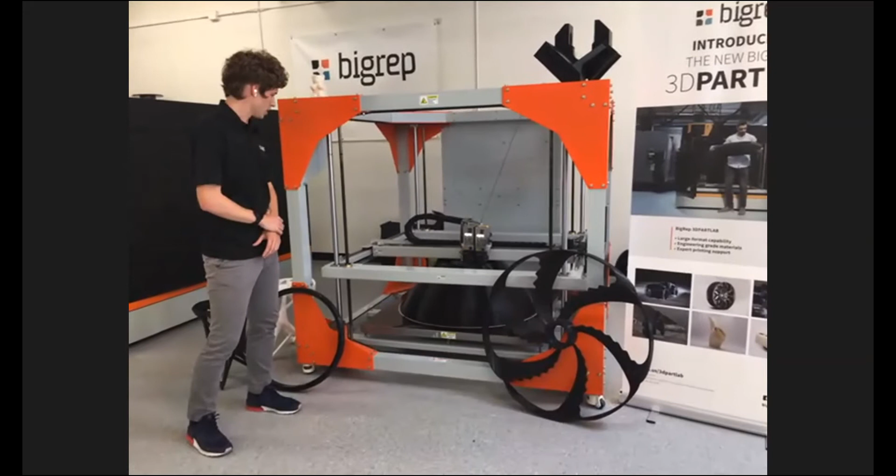So right away you can tell, outside of the large volume, there are 2 extruders, meaning we have dual extrusion capability. They are retracting heads in that both of them will not be printing at the same time, but one will be raised or lowered in the Z so that they can switch off during the prints. So the part we have here is just a very large dual extrusion print.

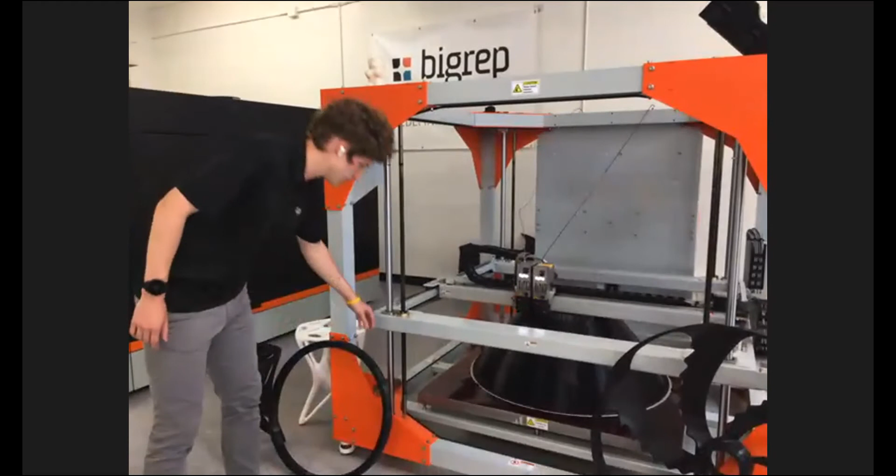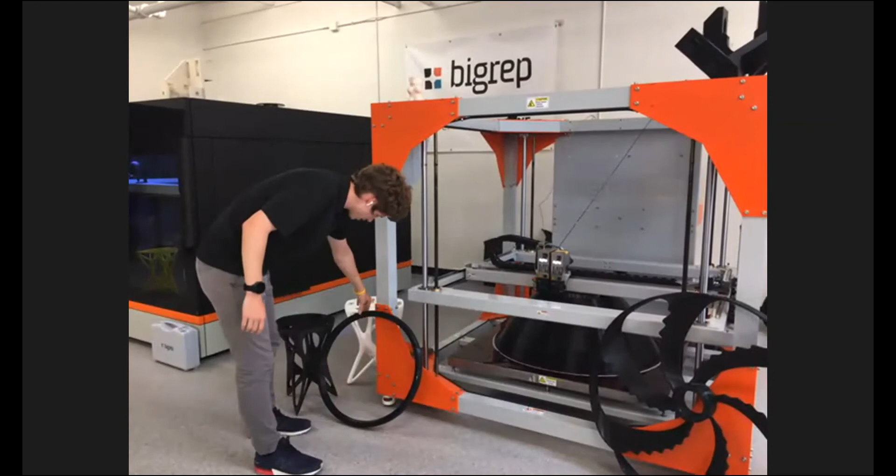The black material is our TPU called Proflex, rubber-like, similar to a car tire. And with dual extrusion, we offer the capability of running either a soluble support, a different color of the same material, or a stronger material for added benefits. In our case, the gray material is our non-toxic ABS called ProHT, similar to what I have here, just strong, durable, very versatile.

The gantry and the motion is belt driven, controlled by Nanotec stepper motors. The bed is 1/4-inch aluminum with a layer of polyimide, or what we call Kapton film. The Kapton film is used for material adhesion for that first layer, as well as spreading out the temperature so everything prints well and you're not going to have any warpage or shifting of the parts as you get higher and higher in the Z.

So Emma, if you want to take us around the back, we can take a look at the types of materials that we're running. So BigRep, we found our niche in large format FDM polymer, or plastic, printing. So no pellets, no powders, and no metals.

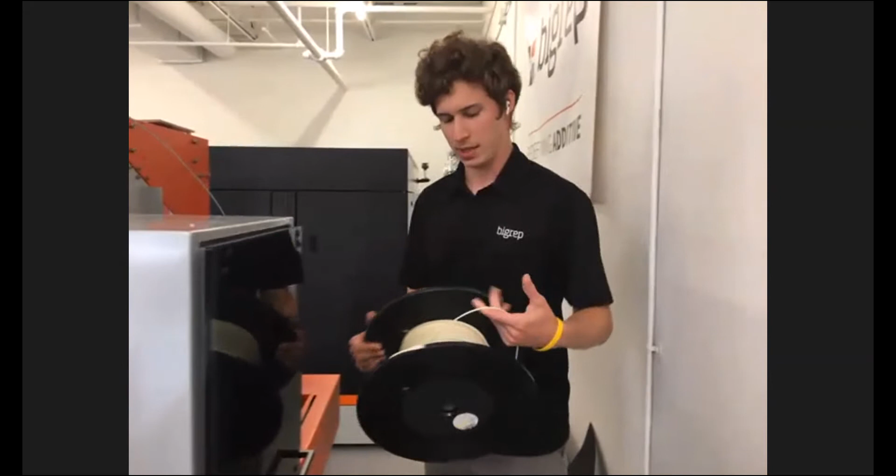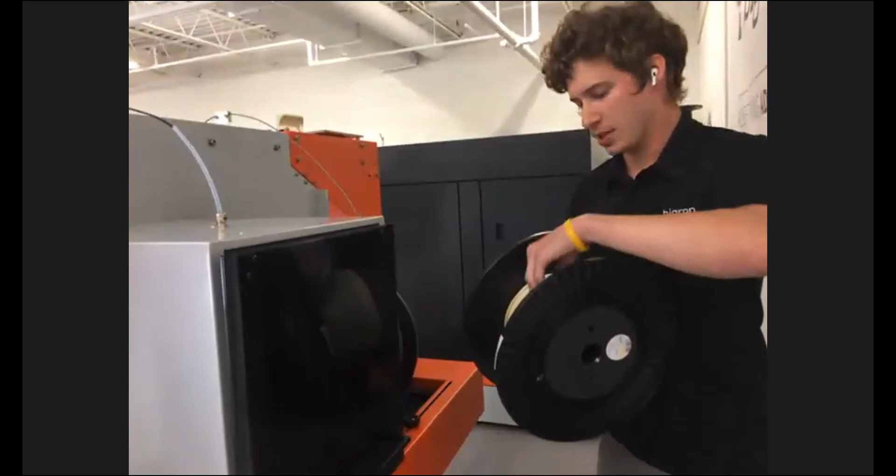So you can see here we have 2.85 millimeter filament. The filament spools range anywhere from 2.5 kilograms to 8 kilograms, or at least that's what BigRep sells. BigRep does offer an open material platform. So if you don't want to run our materials, it's very easy.

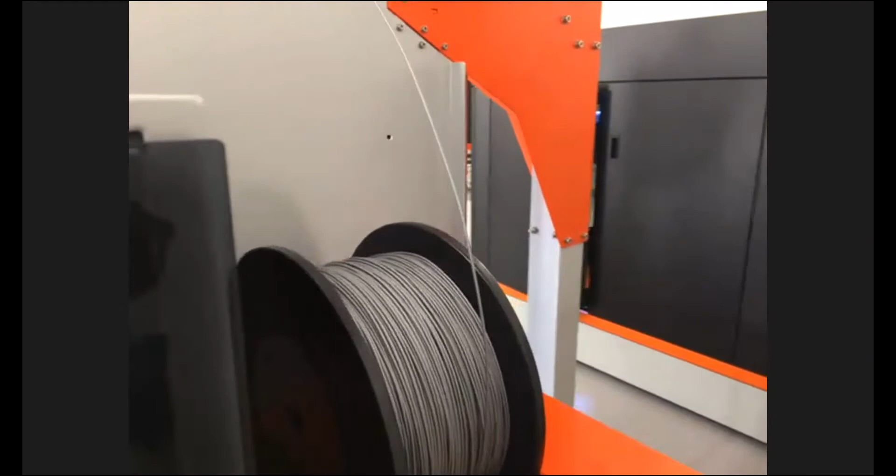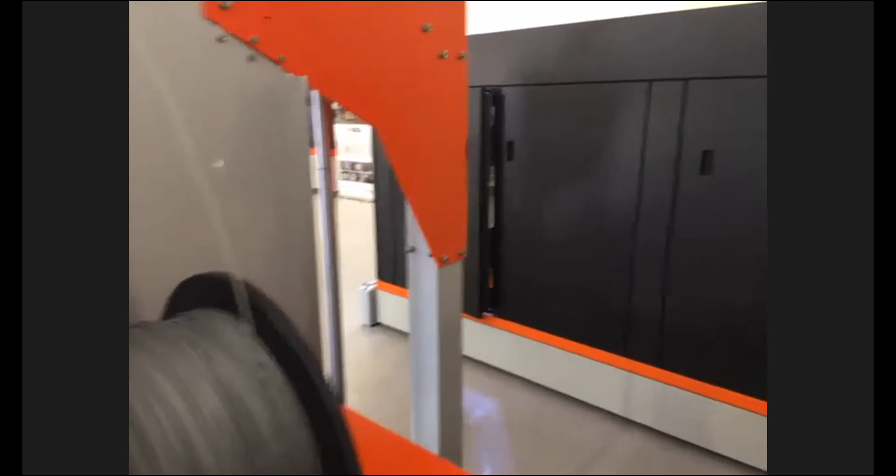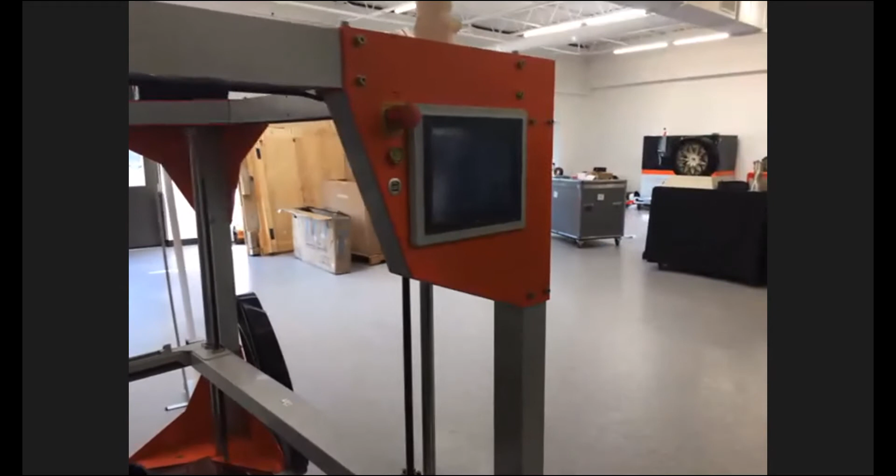Plug in your files, press go, the machine knows what it's doing. Or if you want to use a third-party material or a new material that we haven't certified yet, the machine doesn't care. We trust our engineering. We trust the throughput of the machine to be able to withstand whatever the customer wants to run through it. So that's something we definitely pride ourselves on.

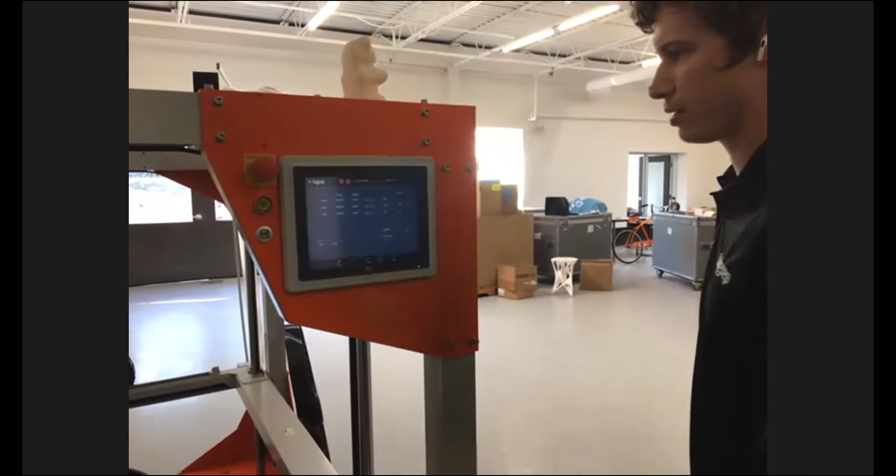What Amnon is showing here is just the user panel. This is where you would load up jobs, run through all of your temperatures, your calibration, things like that. Very easy, very straightforward in terms of usability.

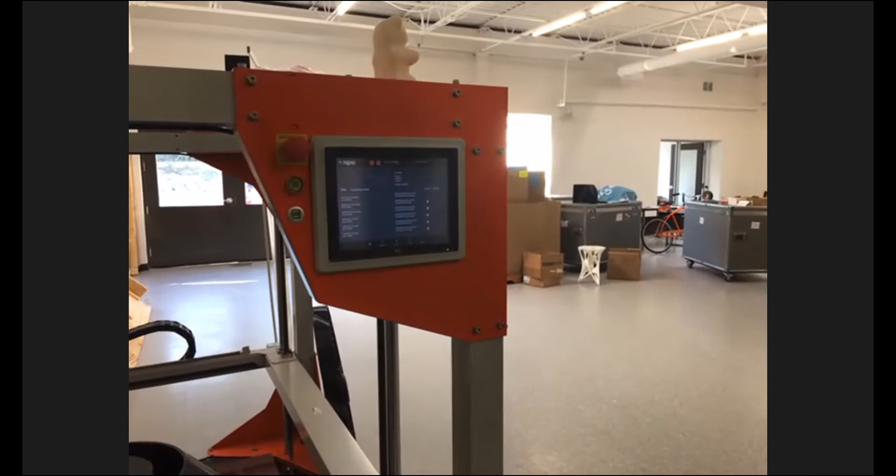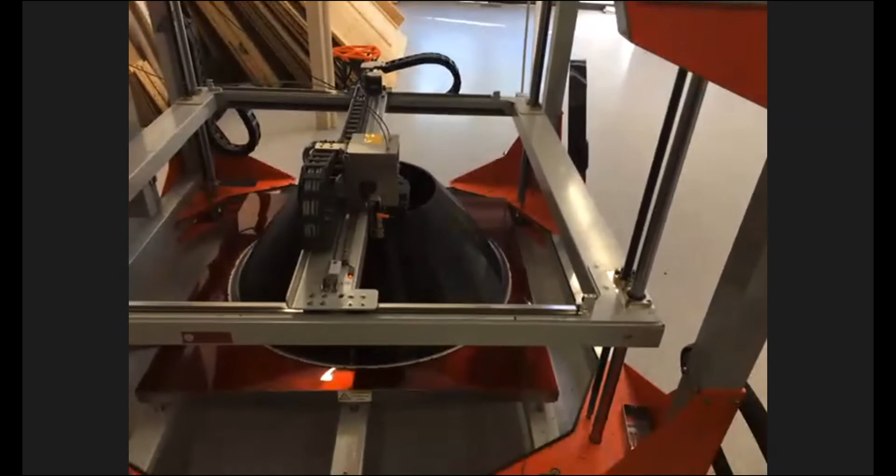Maintenance is pretty minimal outside of the initial calibration during installation. As long as you're keeping the gantry and the bed clean of any dust or leftover particles, as well as keeping the spindles in the Z axis well greased, there's not much to do.

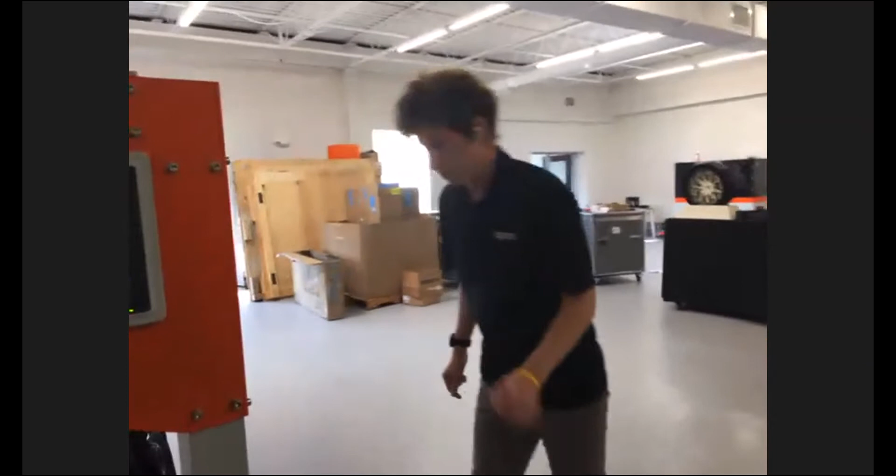And then some other added bonuses, if you have the BigRep One on an Ethernet connection, that allows for online file upload. We also have a couple added features like camera, remote monitoring, and things like that. I think that's it for the One. At this point, I'll take any questions, anything that I may have missed so far.

Yeah, we've got a couple questions that have come in. The first one is about the semi-automatic bed leveling feature. Can you explain that? Sure.

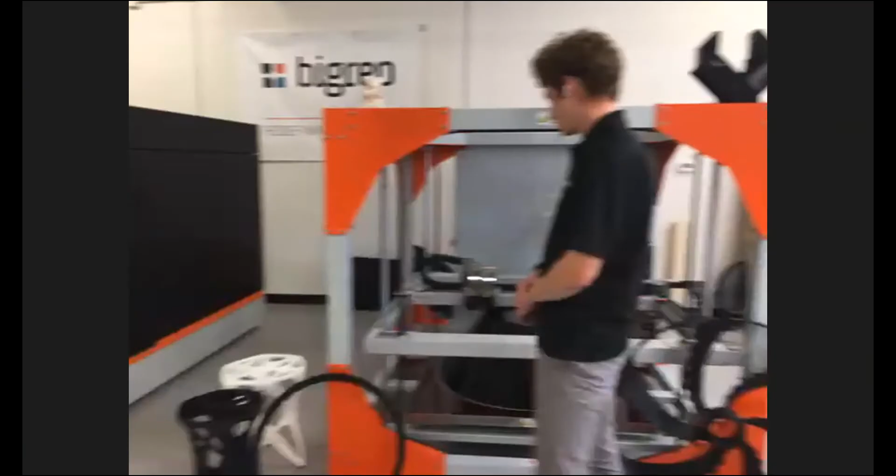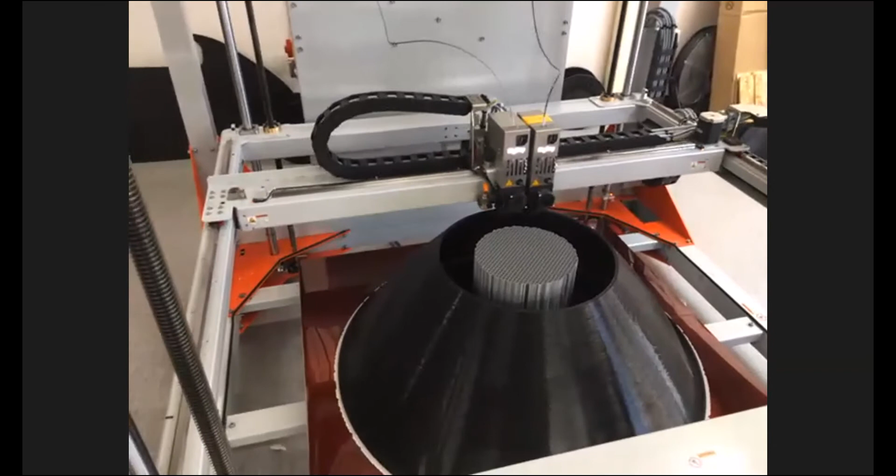I don't know if you actually want to take a closer look at our sensor on the left here. So what we have is an inductive sensor, in short a proximity sensor. What that does is go around the outer edges of the bed. I believe it's 8 separate points. At each point, you will get a certain reading. Our tolerance for that reading is about plus or minus 0.02 millimeters.

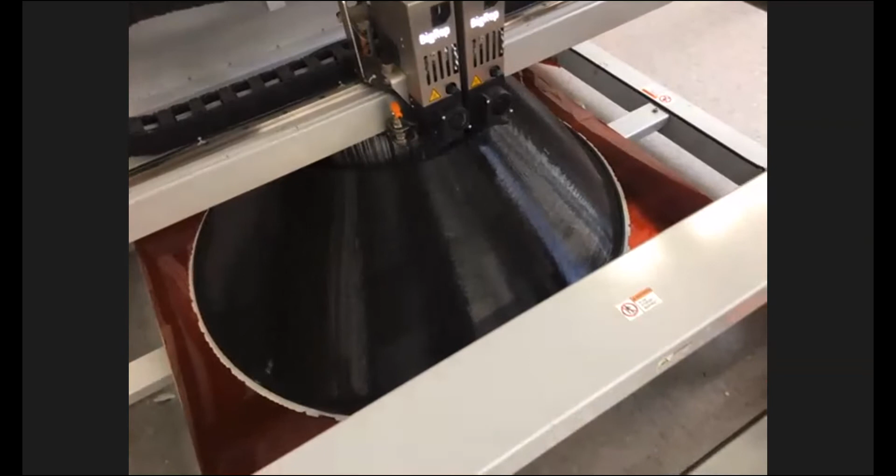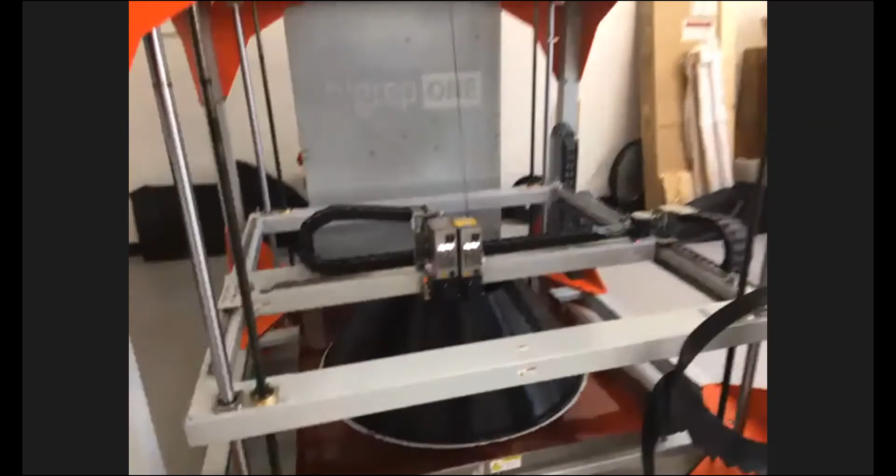So we would get each point all across the bed to within that range, so that after a couple iterations of going around the bed, it takes the technician maybe 15, 20 minutes. The bed will be perfectly level. We do this twice during installation. After that, I don't check it for at least another month or so, unless you're seeing quality issues, which is very, very rare. So very easy, very reliable. Again, that's what you're looking for in a workhorse like the One.

All right, another question we've got: is there any influence from ambient room temperature on the printer?

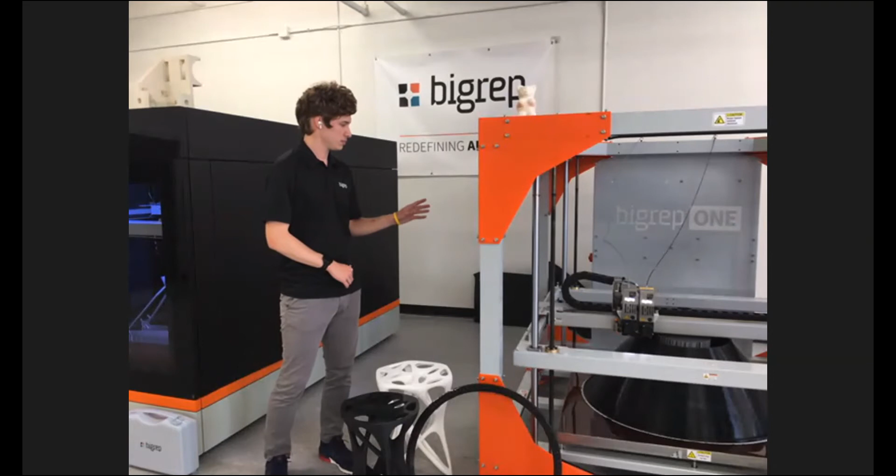So for generic stuff like PLA and Pro HT, working temperature is anywhere from 40, 50 degrees Fahrenheit up to 90 or 100. Obviously if you're in the dead of summer in Arizona, you may see a small change in the way the material prints. For materials like PVA or TPU, you saw earlier when Amnon went behind the machine, there was a dry box around one of the spools. So we do some pre-processing or pre-drying of the material before it's run, just to alleviate any temperature or humidity issues that may come up in certain facilities.

All right, good. Got a couple more questions coming in here. How difficult is removal from the build plate?

Part removal is material dependent, similar to the temperature and humidity issue. For example, TPU does like to stick a little bit to the bed, but when you cool the bed from 60 C all the way down to room temperature, that thermal process releases the part. Some customers like using the 3D printing adhesives we provide. They're water soluble, so if you use a spray bottle around the edge of the part, the water will soak in and remove any leftover adhesive, creating easy removal of the part.

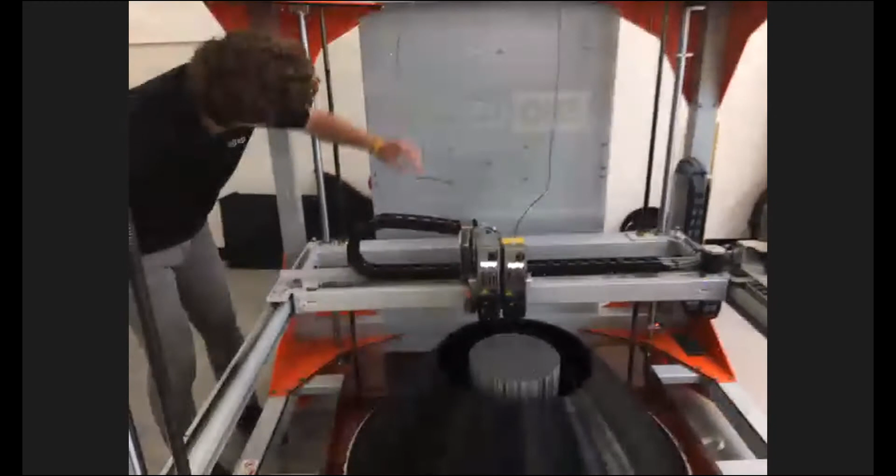Great, and BigRep, big parts. One question that came in: how easy is it to swap materials if you have to do it during a build? Yeah, so there are a couple different locations on the printer where we have out-of-filament sensors. There's one in the extruder and one above the filament chambers.

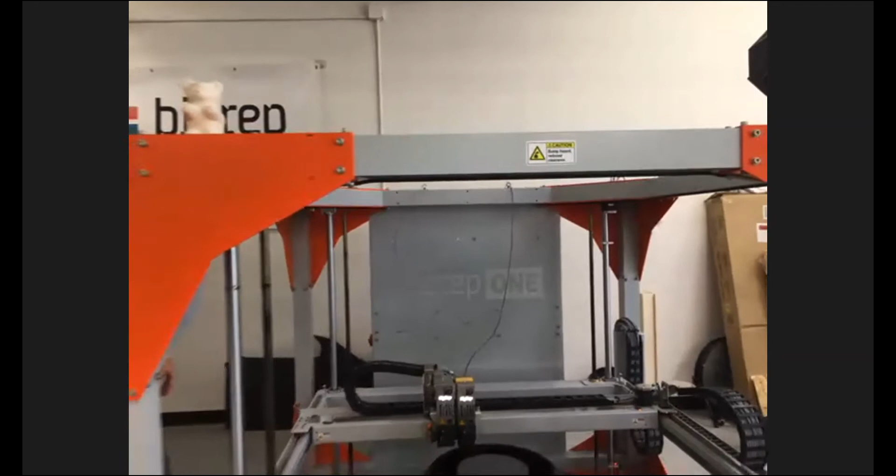It's a physical switch. When it detects no filament, it gives a pause sequence to the printer. Wherever the head may be, once it recognizes that command, it will pause, turn off the nozzle temperatures, raise a little bit from the bed, and then give instructions for the user to reload material, turn the nozzles back on, and resume. It resumes from wherever it previously stopped.

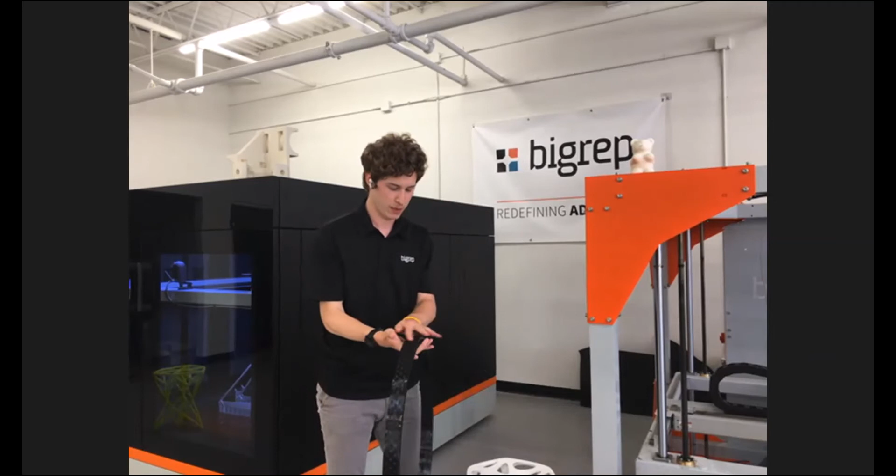So one thing I forgot to mention with the nozzles: they can get upwards of 300 C. With the BigRep One in its third iteration, we've come up with power extruders which have the ability to change nozzle sizes anywhere from 0.6 millimeters all the way up to 2.0 millimeters. Depending on the types of parts you're running, something with a bit of tread or maybe a simpler geometry, you can add different hardware to go either low and slow for very good looking parts, or run the 2.0 for faster throughput. They won't look as good, but depending on the application, you may not need it.

All right, looks like that's all the questions on the One. All right, we'll move on to the Pro. Yes.

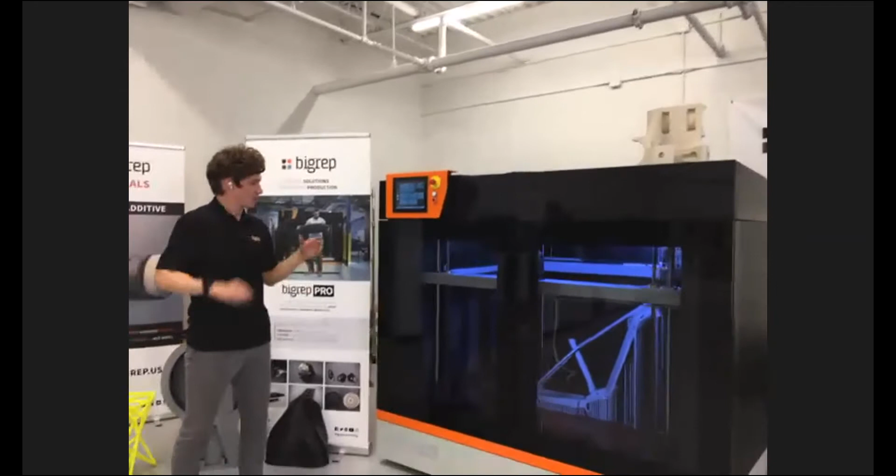All right, so the Pro is kind of like our upgraded version of the One. Clearly it has the full enclosure, and with that we can run higher grade engineering materials. So in addition to the enclosure, there are two main features that I think separate the Pro from a lot of the other standard industrial 3D printers. One is the new type of extrusion technology that BigRep has developed, which we call MXT. And then the gantry and the control systems.

We have partnered with Bosch Rexroth to incorporate their electrical components into our printer, so that we can track a lot of data, run it really fast, and have the consistency and throughput you're looking for in a high-end machine such as this.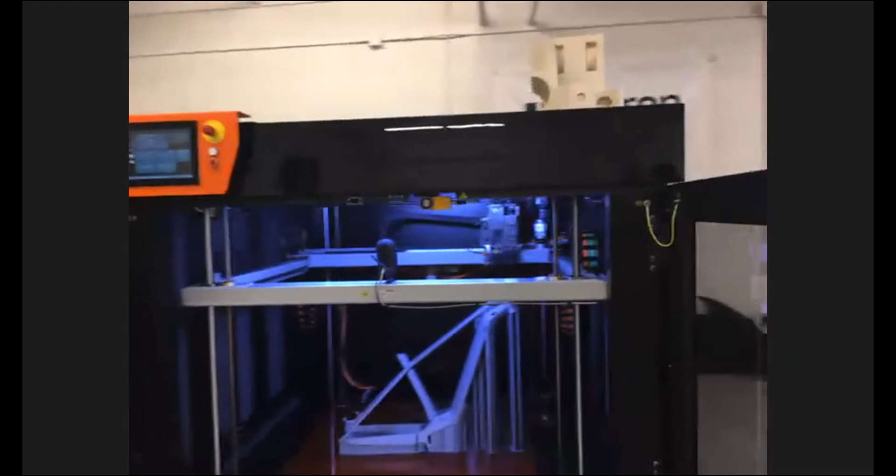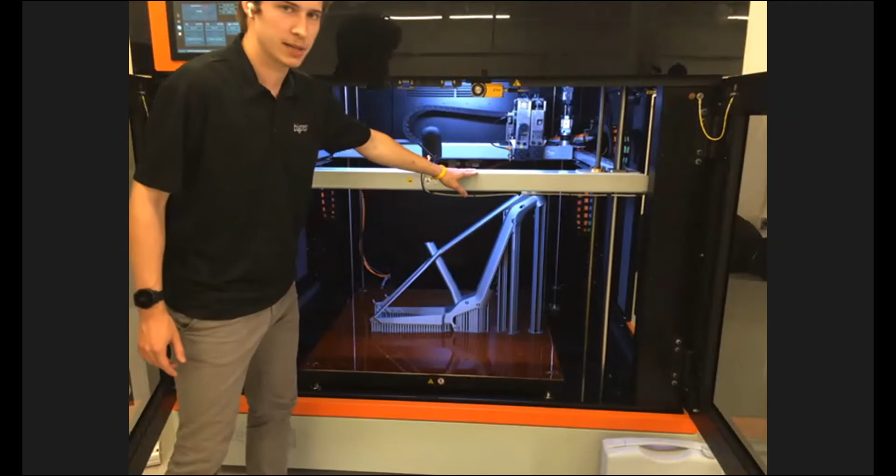So if I open up the door, I can get a nice little view of the inside. This part here finished, I believe, either this morning or last night. It's in our Pro HT. On the upper right-hand side, you can see the two extruders. I mentioned MXT — we also offer an extruder called ACE, very similar to the BigRep One extruders.

It just goes a little bit faster because it has a little bit more upgrades. So MXT versus ACE—let me take a step back.

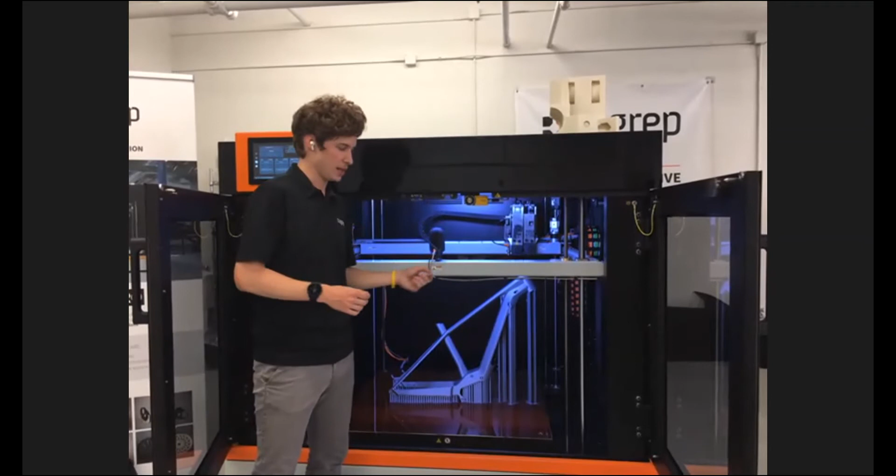The limiting factor in terms of speed for FDM printing is the thermal process. You bring in your filament, have it heat up, and constantly wait until you can continue moving with your print. With MXT, we now have a small pool of pre-melted material so you're no longer waiting for that filament to melt. You will always have something to push out, to extrude.

So now our limiting factor is actually how fast we can move the gantry with the new CNC control system. The MXT right now is for materials like nylon, with more engineering grade materials to come. The ACE serves as a support extruder, and handles all the other standard materials that we offer.

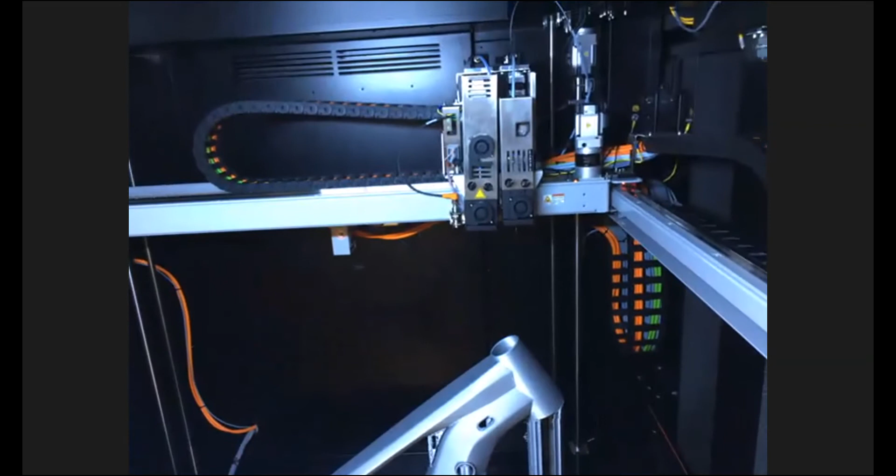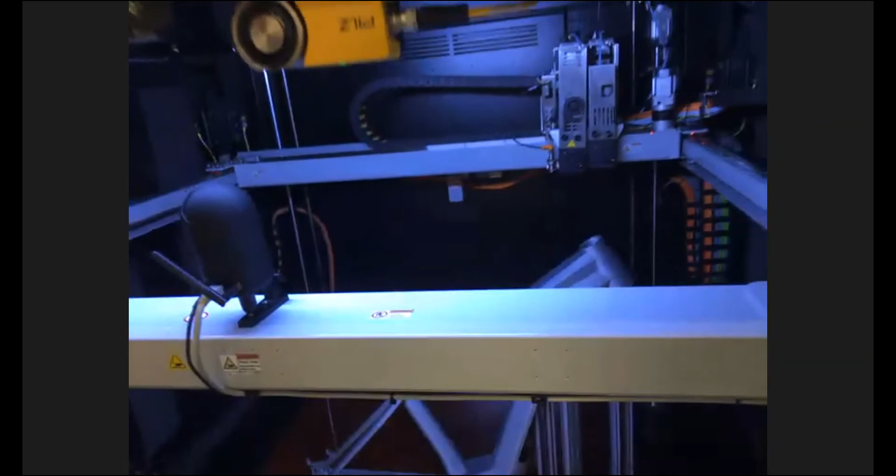In terms of setup, we offer dual ACE, dual MXT. The ACE will have a range of nozzle sizes, like 0.6, 1.0, and 2.0. The MXT right now will have 1.0, with the other sizes soon to come.

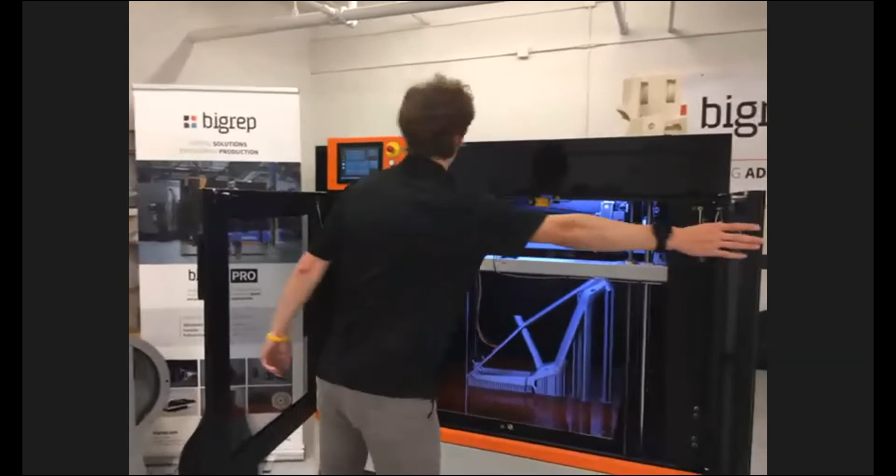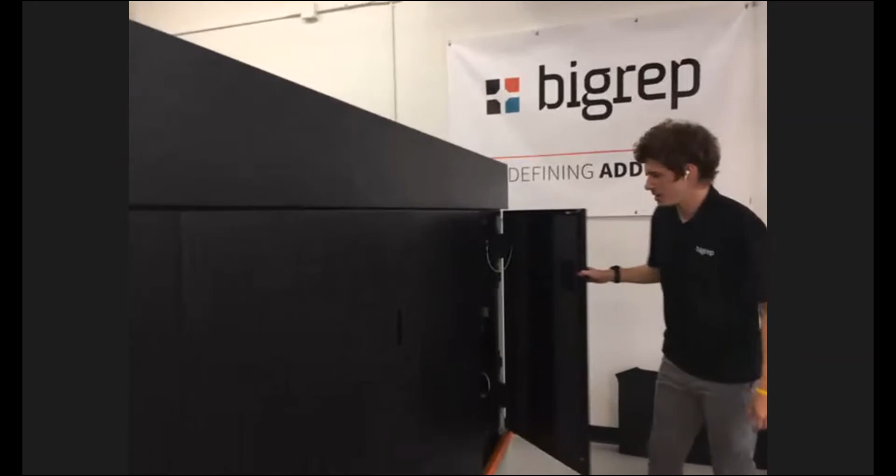Because we're dealing with mid-grade engineering materials now with the Pro, we added a couple more ease-of-use features when dealing with material. We have the heated filament chambers on the left-hand side and the right-hand side, just to dry out your nylons, your ASAs, to make sure there's no more moisture within the filament and you're not going to experience any clogging or quality issues as you're printing.

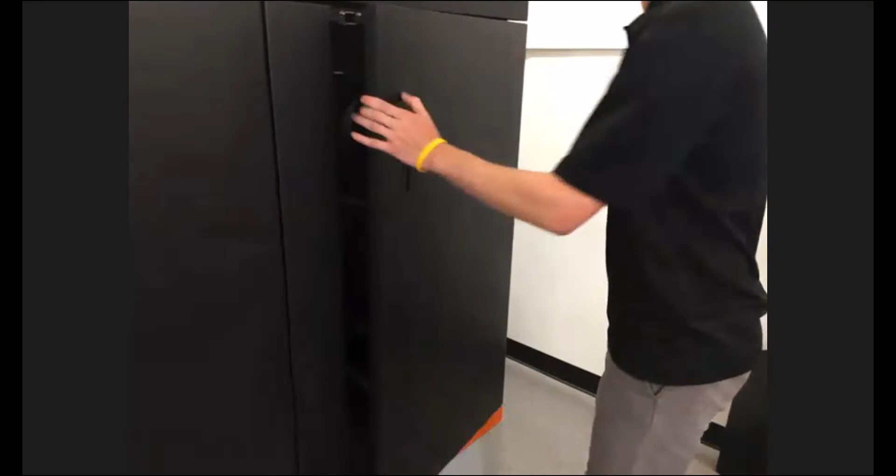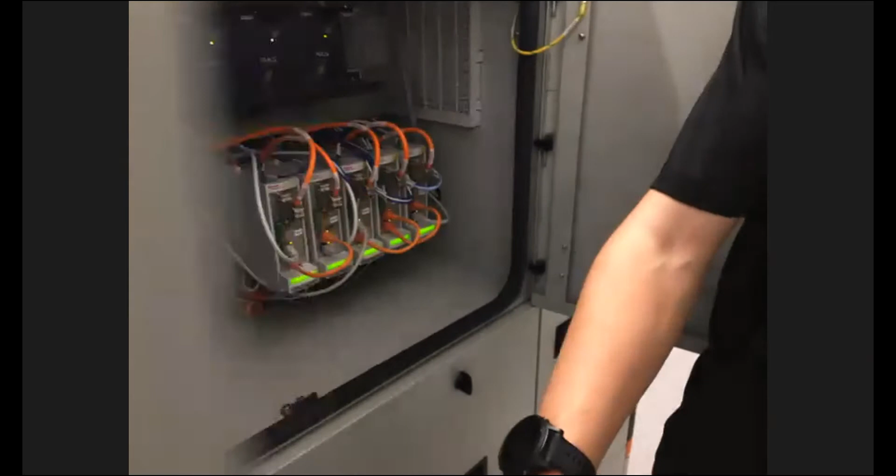All right, just a quick little peek into the electronics, just to show you the scale of what we're working with and how much we appreciate what we got from Bosch Rexroth. Something like this, you can see it's a very high-end piece of machinery. At this point, we're just getting our feet wet with what we can do and the amount of data we can store from our prints.

At this point, if you're running the Pro with the speed and the throughput, you're printing end-use parts, inline manufacturing, and we can gather the data to gather what's in spec, out of spec, determining your spec—everything that you would need to print high volume parts, large parts, very consistently and at a high quality.

Similar to the one, once you get it on Ethernet or internet connection, you can have the onboard camera, you can do your file upload remotely, all of your standard features there.

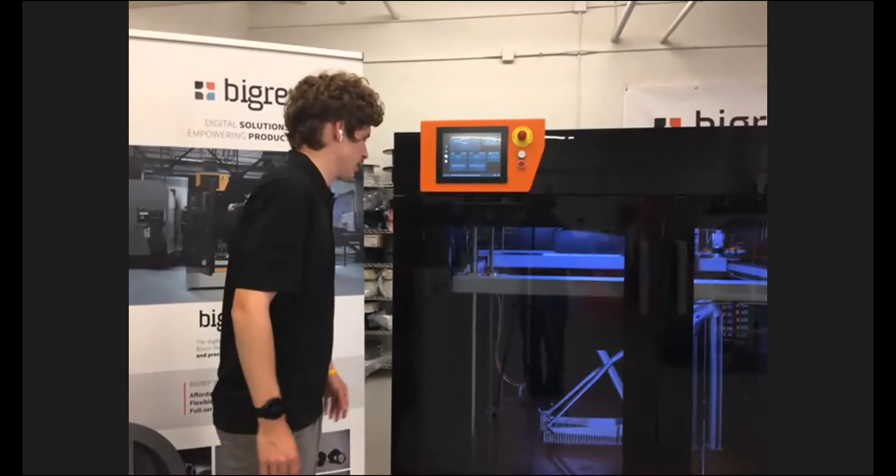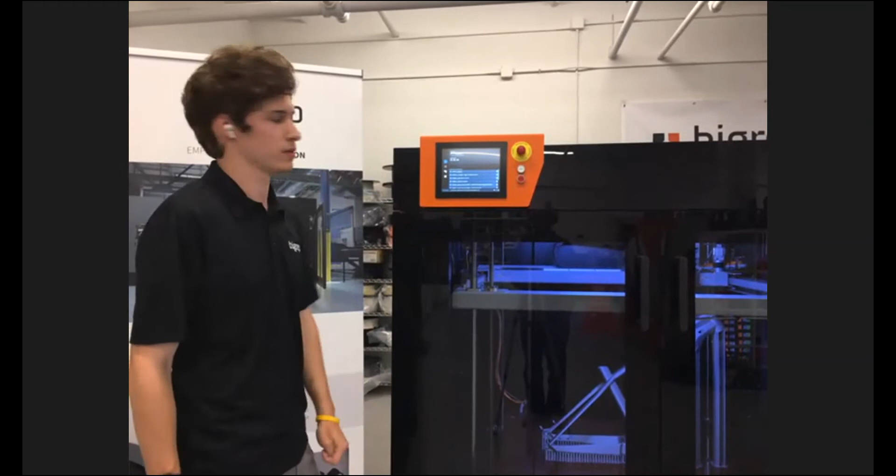The control panel, the user panel, this is actually Windows-based. The BigRep 1 and the G2 are Linux-based. Windows is just a little bit easier for us to incorporate the Bosch Rexroth, and it's a similar setup to the BigRep 1—very easy, very intuitive control panel and usability.

All right, any questions regarding the Pro? Oh, we've got some. A few more are coming in. The first one is, how big is the actual unit?

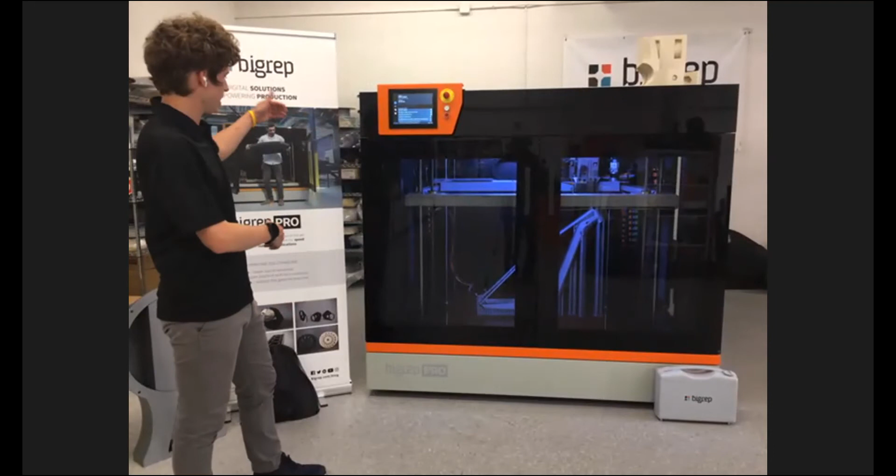So actual square footage, it's about 6.5 feet wide by 8 feet long, and about—so I'm 6 foot, so it's maybe a little under that for the height.

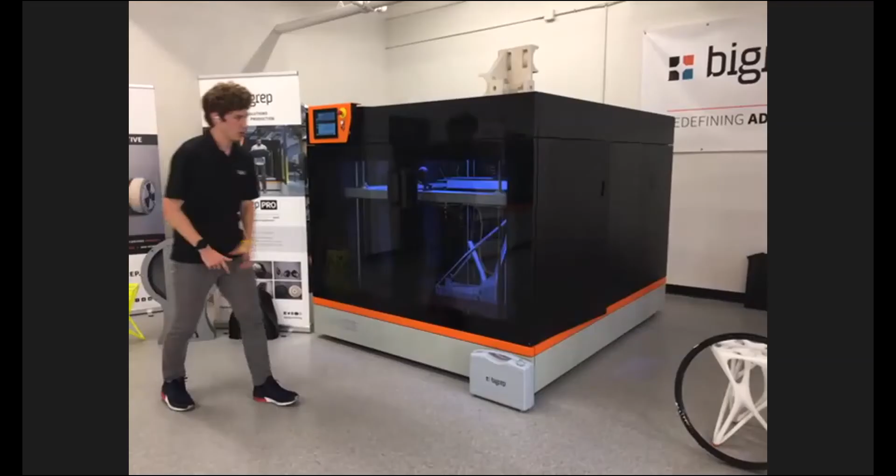Can you give a comparison of printing time from the 1 versus the Pro? Yep. So the BigRep 1 already is about 1.1 to 1.2 times as fast as your other leading FDM printers. Stepping from the 1 to the Pro and the MXT, it's about 2 to 3 times as fast.

And like I said earlier, we're just getting our feet wet with the CNC control system and really maximizing that. At this point, pretty soon we'll be upwards of 3 to 5 times as fast with a whole range of materials.

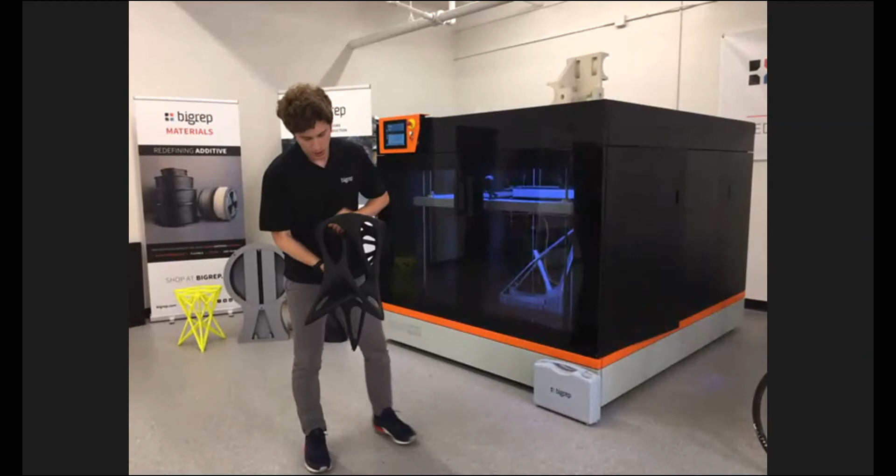So to put some of the scale into perspective, this chair here on the BigRep 1 took about, I want to say, 30 hours. This is in our Pro HT, probably 5 to 8% infill. If this was printed on the Pro with MXT, it'll take about 12 to 15 hours. Pretty big time savings there.

One more question: Does the Pro print in ABS? Yes, either in the MXT or base.

Great. Does anyone else have any other questions on the Pro? Oh, sorry, one more coming in.

What is the power requirement for the Pro? And I guess while you're at it, maybe backtrack to the 1—what's the power requirement for that as well? So I'll start with the 1. The 1 is 208 to 240 volts, 20 amp. And then the Pro, because it's a little bit higher end, it's about 400 volts and then a 30 amp plug.

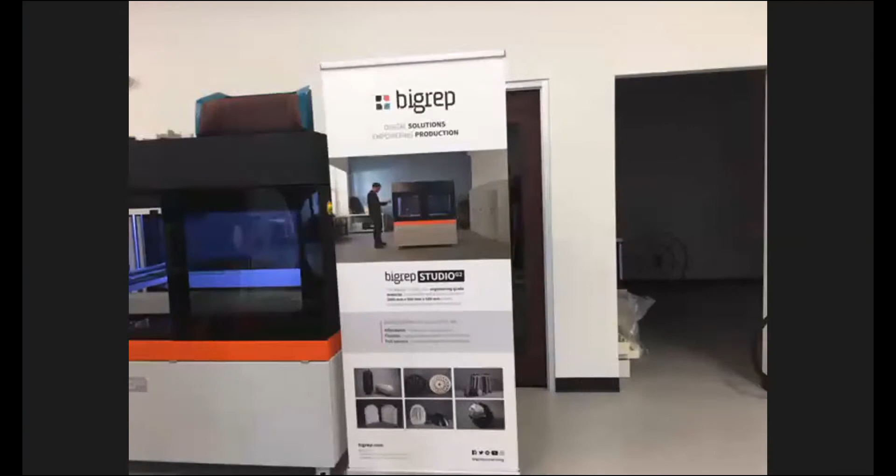So now we are going to move on to the baby of the BigRep family. Yeah, baby is definitely a matter of perspective here. This is still very large, a print size of 1 meter long by a half meter wide and a half meter tall. It's kind of like a mini Pro, if you would.

The G2 is actually the 2nd generation of the Studio. We have the original Studio G1 on the left here.

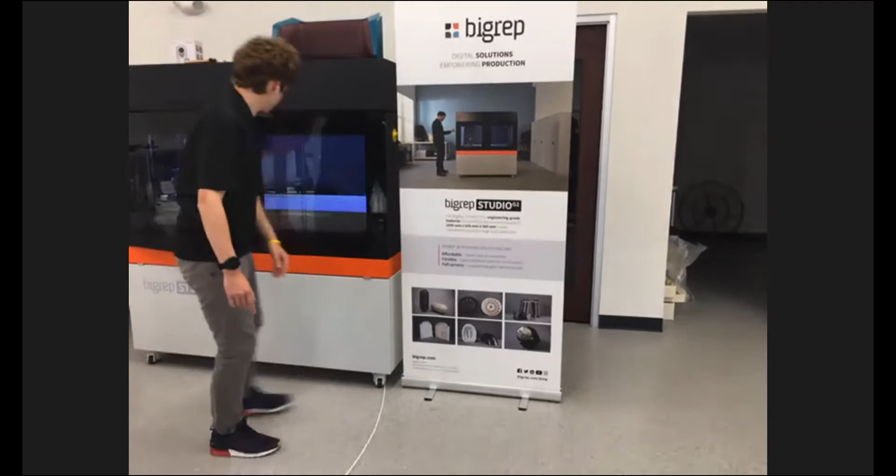Open environment, closed environment. So the same range of materials that you would have for the Pro, we offer on the Studio G2. And then similar to the Pro, we have heated filament chambers on the bottom. Ambient heat from the bed can get the print chamber anywhere from 50 to 60 C, depending on the material that you're running. If you need it a little bit cooler, there are fans in the back to expel any leftover heat.

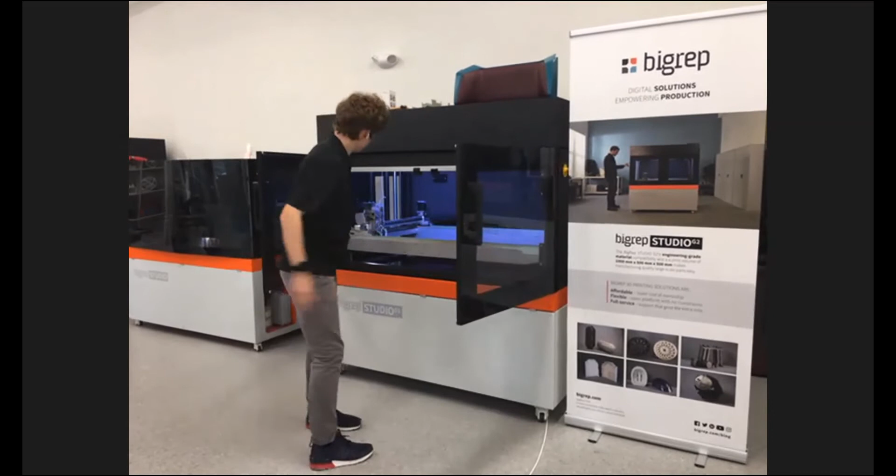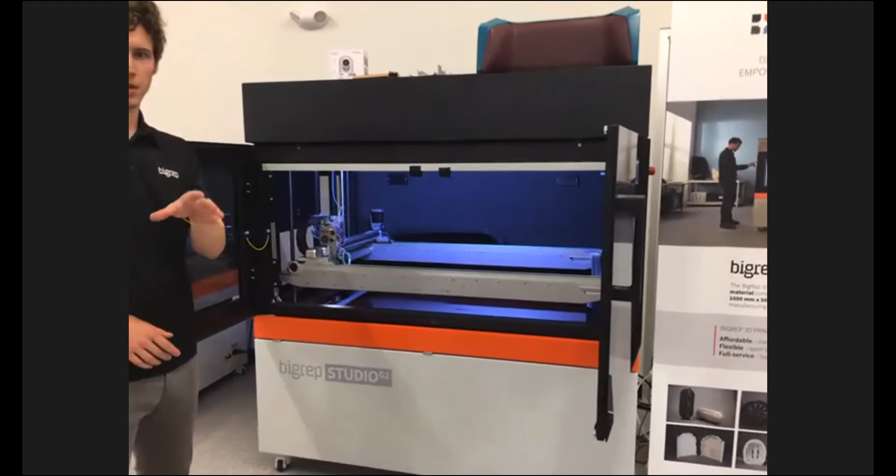Taking a look inside, there is a single extruder on the G2, but there are still 2 heads, 2 nozzles on the inside, so you will get the same dual extrusion like the Pro and the 1. The Studio G2 offers hardened steel nozzles, similar technology to the BigRep 1, just with the upgraded hardened steel nozzle. So you can use the carbon filled, the glass filled, all the materials that would normally ruin more standard nozzles. And then like the 1 and the Pro, we have the camera, the belt-driven gantry, all of the fun stuff that allows us to run 24/7, 365 for whatever you want to put through it.

Chris, what kind of nozzle does the G2 have and what is the biggest nozzle size it can run? By default, the hardened steel nozzles on the G2 are 0.6 millimeters. We found with the print size and the types of prints that customers were running initially, 0.6 was a good starting point. We do have customers swap out their own nozzles. We don't sell anything outside of the 0.6 by nature, but with the way we run our materials and our slicing software, it's pretty hackable in terms of software and hardware. So we have customers running 1 mil nozzles, 1.2 mil nozzles, whatever they like.

Temperature ranges for the bed and chamber? The filament chambers, where you're heating the material, those get upwards of, I believe, 50 C. The bed is upwards of 100 C. And like I mentioned, the ambient heat from that bed can get the print chamber to 50 or 60 C. And then the nozzles, where you're printing out the material, they are upwards of 300 C.

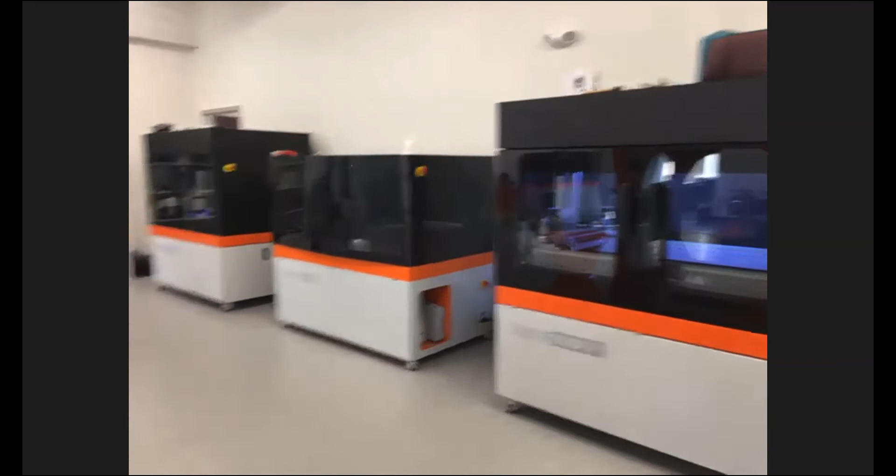Any other questions? We've got maybe a few more coming in. Chris, do you have any parts handy right there that were printed on the G2 that you could give a time estimate on? Not to put you on the spot, but maybe Amnon can grab something behind you. Let me walk over there and take a quick peek at our wall of parts. And while he's looking for that, Maggie, I'll give you your cue to get ready to go as well.

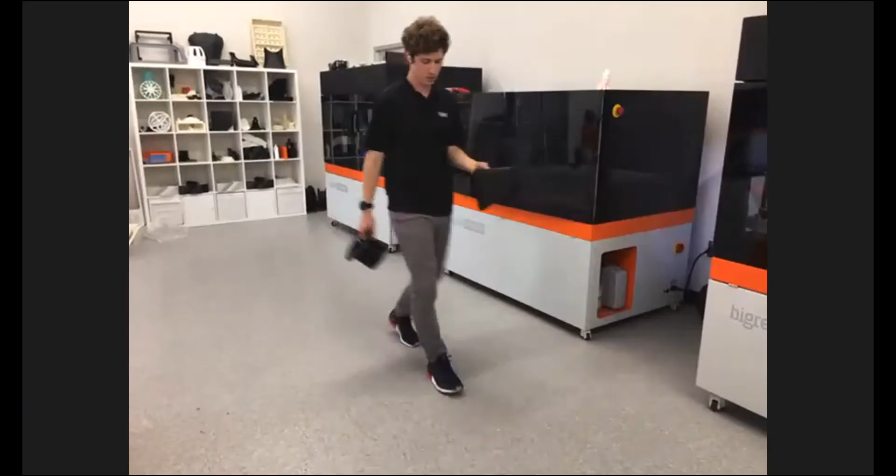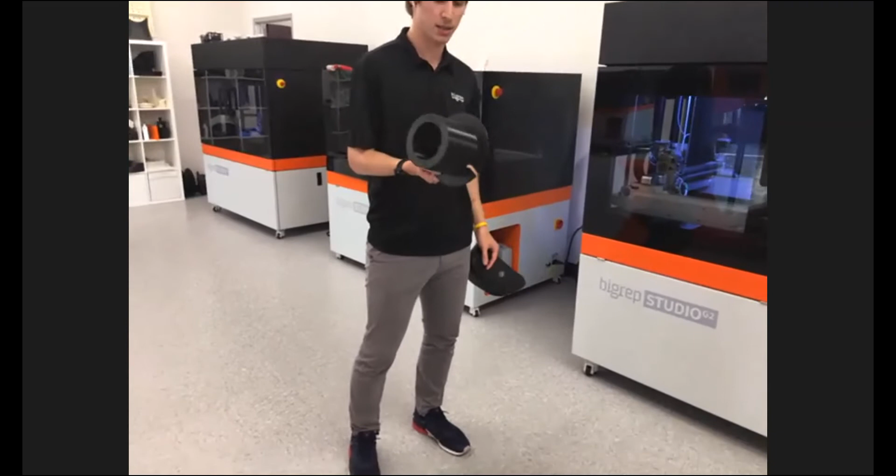All right, so I just grabbed a couple from what we had available. With the 0.6 nozzles, obviously the throughput compared to using a 1.0 or a 2.0 nozzle is a little bit lower, but with that you have improved resolution and overall finish. So something like this, even though it's a 0.6, it still takes just a few hours. Something like this, probably about 5-6 hours time. And then something like this is about 4 hours, just due to the geometries.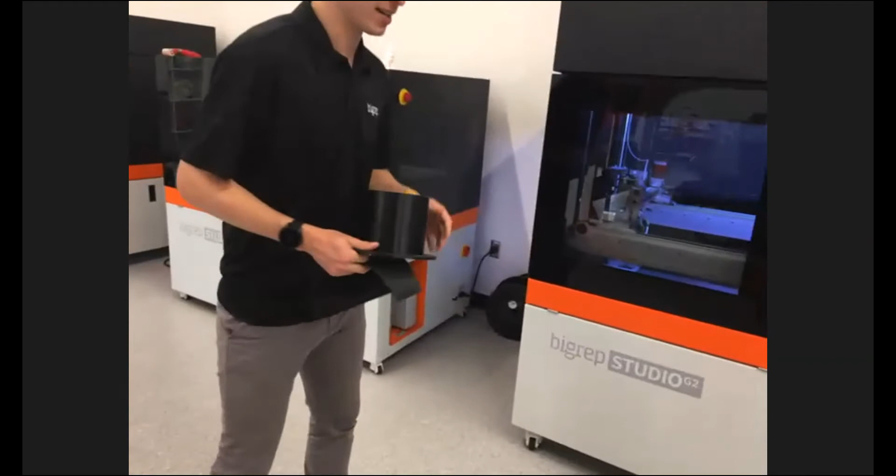And I can give you the close-up view. You could be a hand model. For resolutions, we have the 0.6 nozzle all the way up to the 2.0 nozzle. With that, our layer heights can be anywhere from 100 microns, or 0.1 millimeters, all the way up to 1.2 millimeters. So like I said, either low and slow, or fast and a little bit rough.

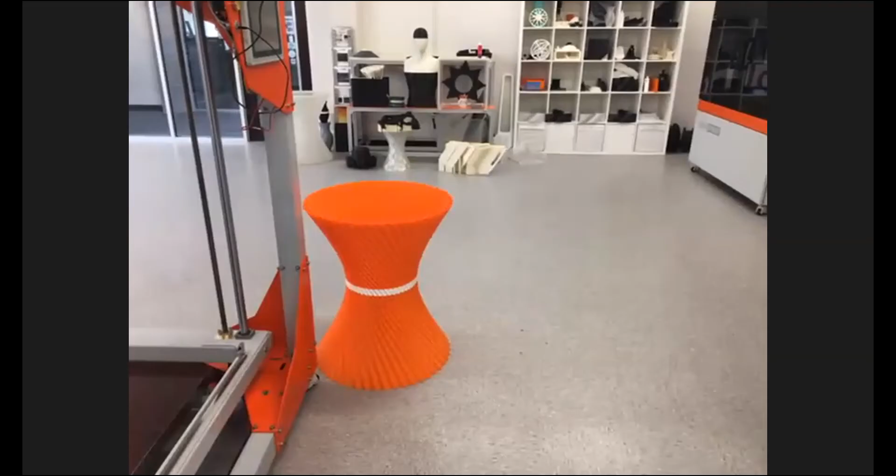All right, great. While Maggie's getting set up, Chris, what's the biggest part you've printed and what's your favorite part?

Yeah, the biggest part took about a month on the BigRep. It was just a giant mold that took up the full print volume, X, Y, and Z.

One part that comes to mind that I thought was pretty unique was a company doing really complex fiberglass piping. Because they couldn't find a really good fiberglass filament, they printed the entire part in PVA, which is a water-soluble support. Once that part was done, they wrapped the PVA in fiberglass, and then because of the water solubility, they just dunked it, had the PVA dissolve, and they just had their fiberglass piping. That was a pretty unique application and use of 3D printing.

Great, and if our printer can run for a month, that should show some good quality German engineering there. All right, thanks Chris, awesome. My pleasure. I think Maggie is all set and ready, so let's turn it over to her.

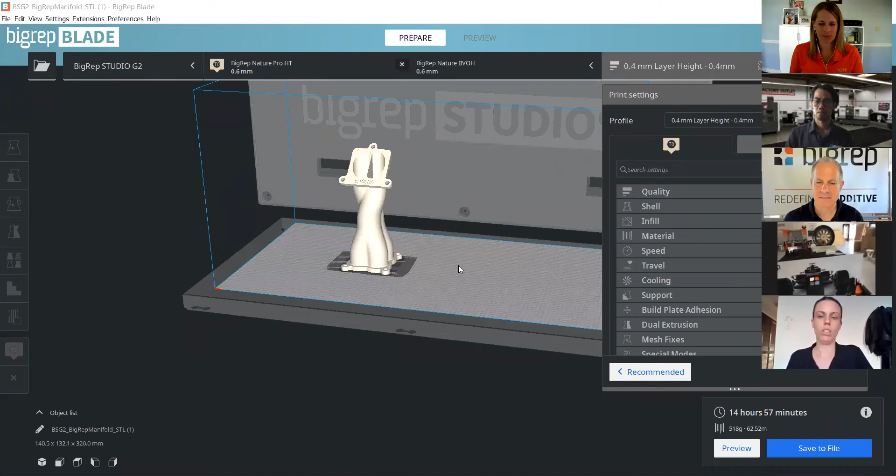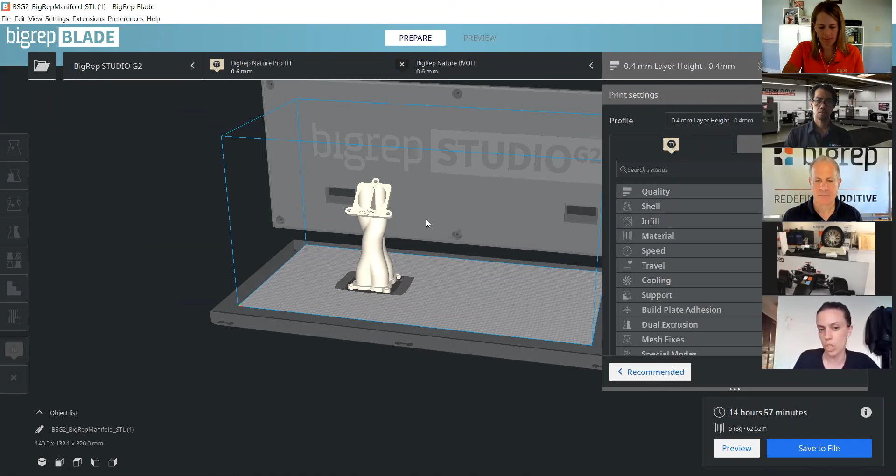Hi, I'm Maggie Cumming, here in Brooklyn, New York. I'm going to do a very brief showcase of Blade, our somewhat recently released in-house slicing software. We've worked with third-party softwares for a long time, but we wanted to provide our clients with a slicing software made in-house, specific for large format printing and BigRep machines.

One of the most helpful bits about our software, something we pride ourselves on, is that it allows for really high optimization for printing parts, in terms of lowering print time and lowering material usage.

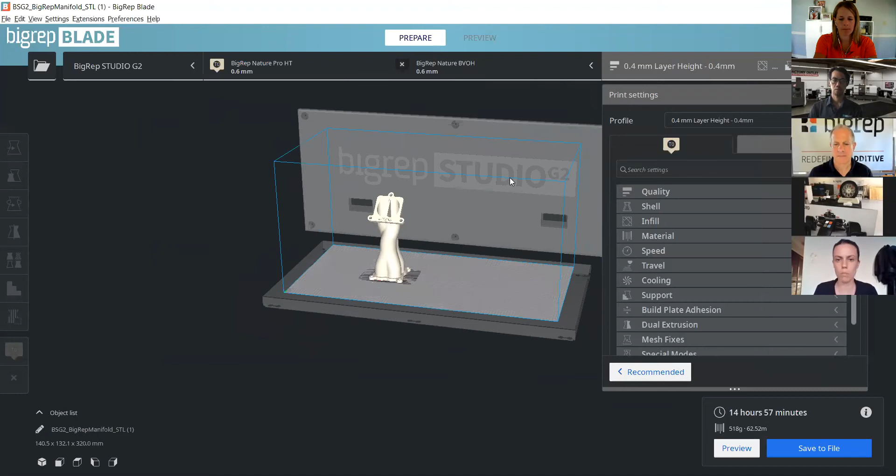Here I'm looking at the BigRep Studio G2, the machine Chris just finished showing you. I have a small sample part, a basic manifold, about medium in size. I've already sliced it, but I'll quickly go through the look of the slicing software. If you've used Cura before, you might find some of the look similar.

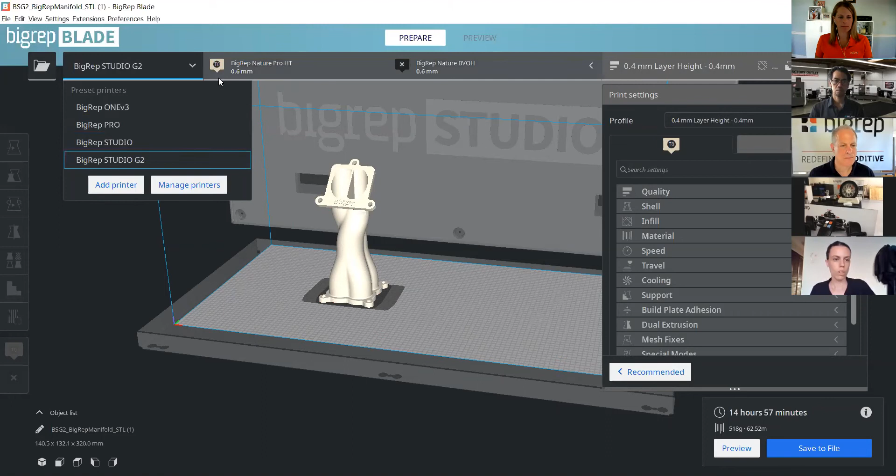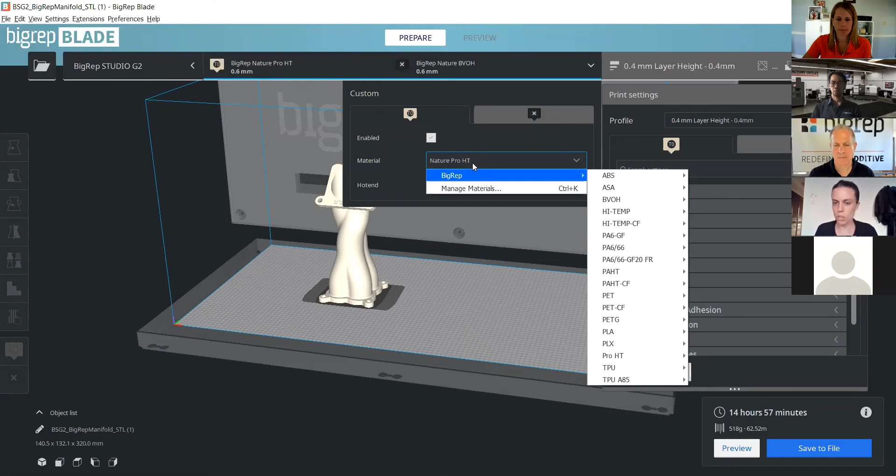Over here you have all your options for all the different machines you can use, then your dual extruder options, and under here is where you'll find all the material options we provide. Since this is in-house software worked on with our software team, R&D, and our material team, we have presets for all of our nozzle sizes and all of our materials on all of our machines.

This gives you the availability, if you aren't super familiar with 3D printing, to get a really good G-code and a really good printed part, while also providing, as you can see to the right, tons of different options so that if you are really familiar with 3D printing and slicing, you can go in there and tweak things according to what you want to achieve.

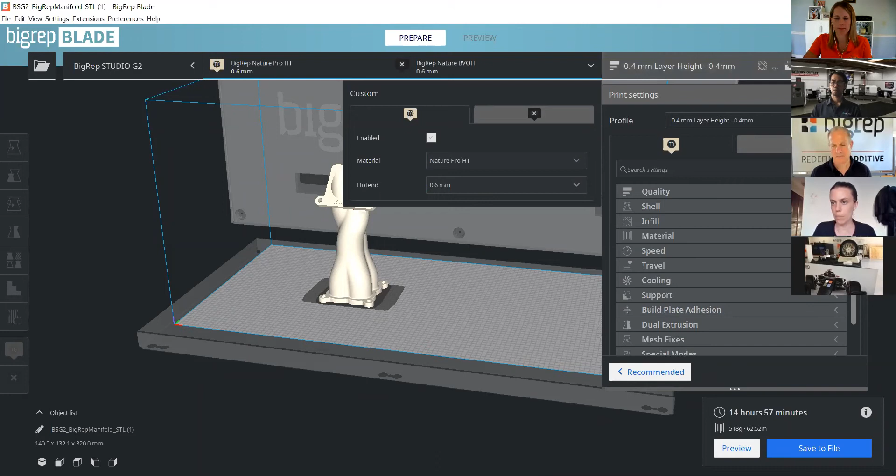The last bit I'll show, I'm going to go to the preview mode here. Essentially this shows you a preview of what to expect. You can go down, look inside your part, see how it will get built up. There are various modes of viewing the part.

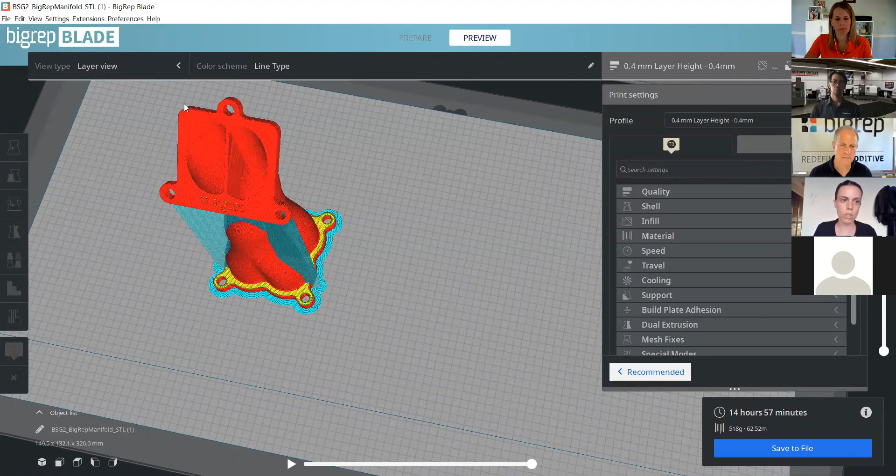Right now, as you can see, I have it in layer view and line type. All the different colors mean different elements of the print, such as red for outer line, blue for support material, yellow for top surface.

Then you can see in the bottom right-hand corner is where the output of time and material is. It gives you a really precise estimate of what your print will take, and tells you the amount of material it'll take. If you hover over this little i, it breaks it down even further for you.

If you are doing dual extrusion printing, it'll break down the amount of material you use for both of the different hot ends, as well as the time it takes to create your infill versus your outer wall versus the skin of your part. So it gives you a lot of options in terms of optimizing your model.

And as Chris mentioned in his demo, if you hit save to file here, if your machine is connected to the internet via Ethernet, you can upload it directly from your computer, the G-code output. Or if that's not possible, you can just save it on a USB and upload it manually to the machine.

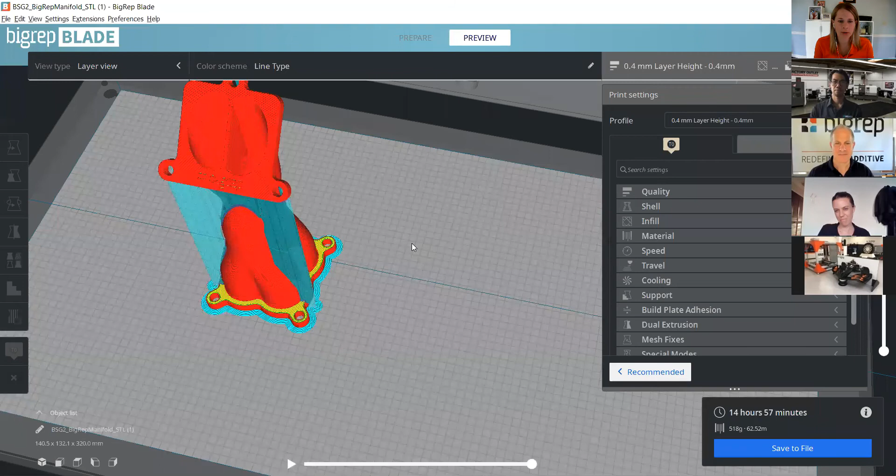Do you have to use Blade? You don't have to use it for the Studio or the One. You do have to use it for the Pro machine, as the Pro includes new technology with the MXT extruder. But for our other machines, you are able to use other third-party software.